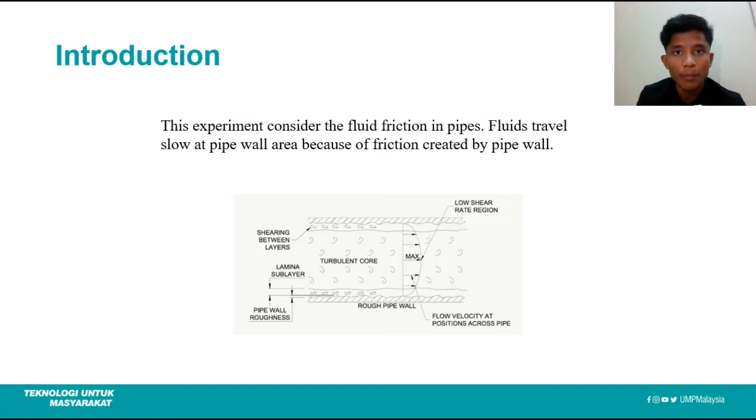I will continue from my part, which is the introduction of the experiments. Basically, in these experiments, we consider the fluid frictions in pipes. The fluid travels slowly at the pipe wall because of friction created by the pipe wall. The figures below show the mechanism of how the fluid flows across the pipes, and we can see the laminar sublayer there. The laminar sublayer is the fluid that moves slowly, and only the turbulent rapid flows allow the sublayer to form.

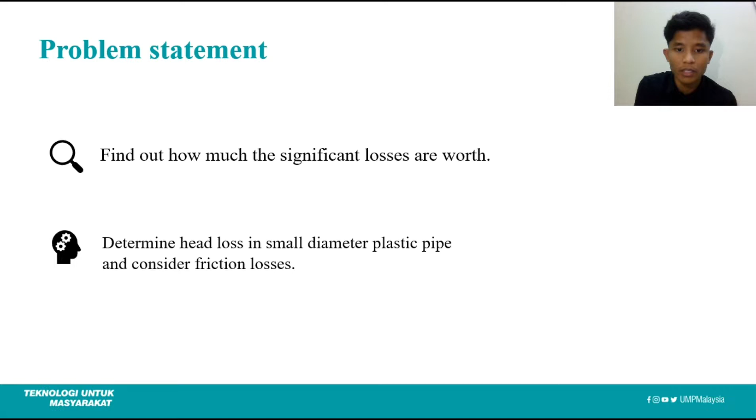Next, we continue to the problem statement of the experiments. Several challenges will occur over the course of this trial to have a good result in the experiments. The first one is we need to find out how much the significant losses are worth, because without this information we won't be able to proceed to the next level. Next, we need to determine head loss in a small diameter plastic pipe and consider friction losses.

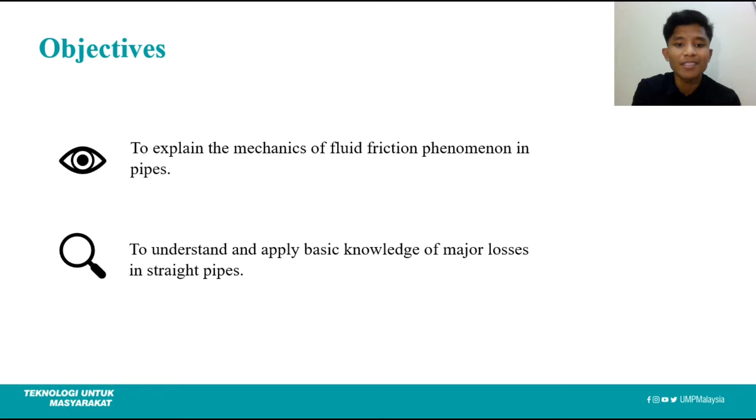The objectives of this experiment are two. The first one is to explain the mechanics of the fluid friction phenomenon in pipes. The second one is to understand and apply basic knowledge of the major losses in straight pipes.

The last part is the scopes of the experiments. First, to determine whether a laminar or turbulent flow will occur during the experiments. The last scope is to investigate the effects of different pipe diameters on velocity. The friction factor will be linked to the range of flow rates.

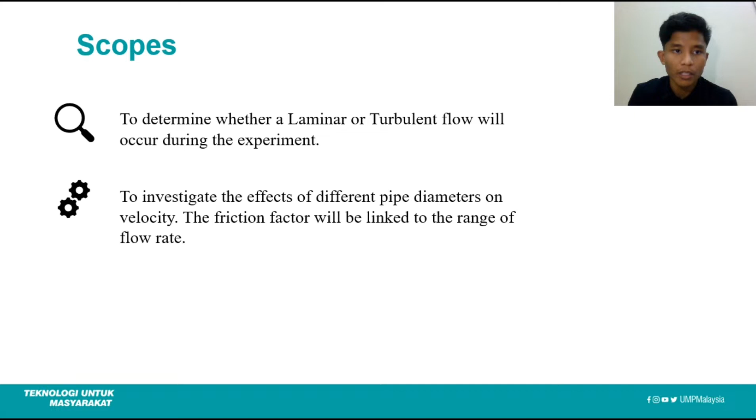For the theory, the pressure loss in pipe flows is commonly referred to as head loss. Major loss refers to frictional loss, whereas minor losses refer to loss caused by fittings. The head loss for pipe flows is the sum of these losses. In the Bernoulli equation shown above, HL represents the head loss due to friction between the fluid and the internal surface of the constant diameter pipe. As we can see here, this is the Bernoulli equation related to our experiment.

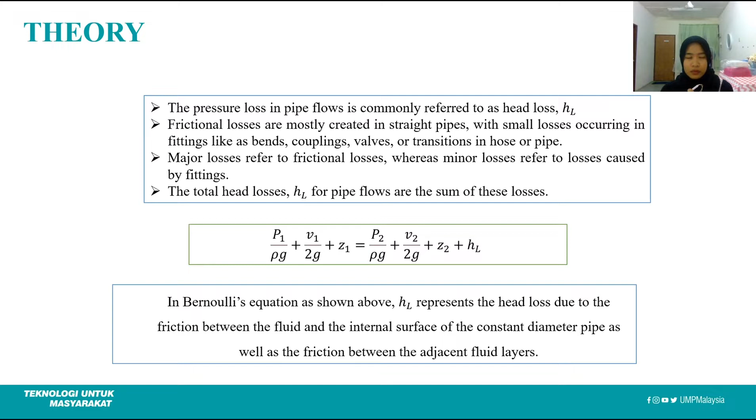Next is the Darcy equation. This is the theoretical equation that determines the loss of frictional energy in a pipe depending on the fluid velocity and friction resistance. There are different equations for turbulent flows and laminar flows. So here we can see the equation for both.

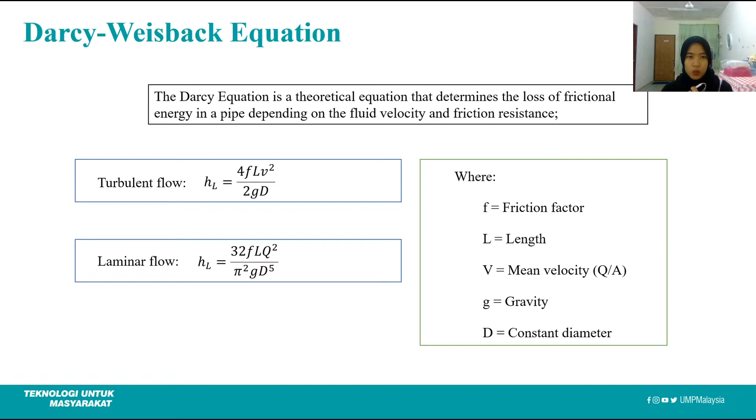Next, I will explain more about laminar flow and turbulent flow. Laminar flow is when every particle of fluid flows along one smooth path. The particles of fluid do not interfere with one another; they don't mix or shift between the layers, as we can see in the picture for laminar flow. Turbulent flow is when the flow of a fluid is irregular. Particles in turbulent flow can move back and forth between layers, as you can see in the picture below.

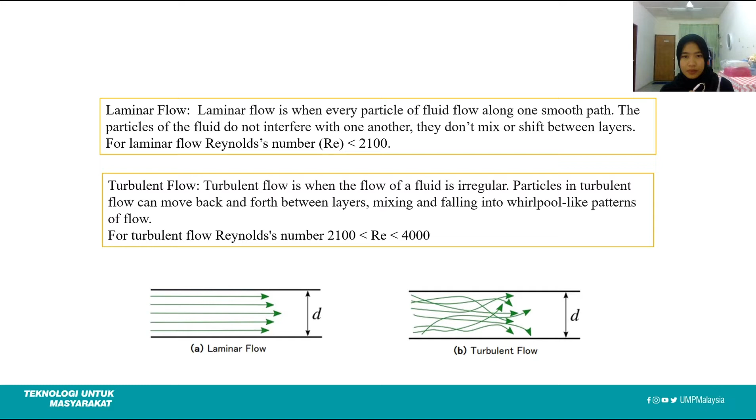The Reynolds number is the ratio of inertial force to viscous force. The Reynolds number is a dimensionless number used to categorize fluid systems. The equation for the Reynolds number here is rho VD over viscosity.

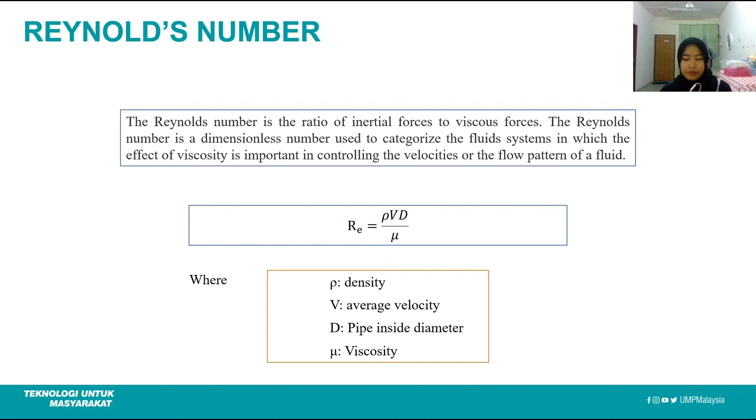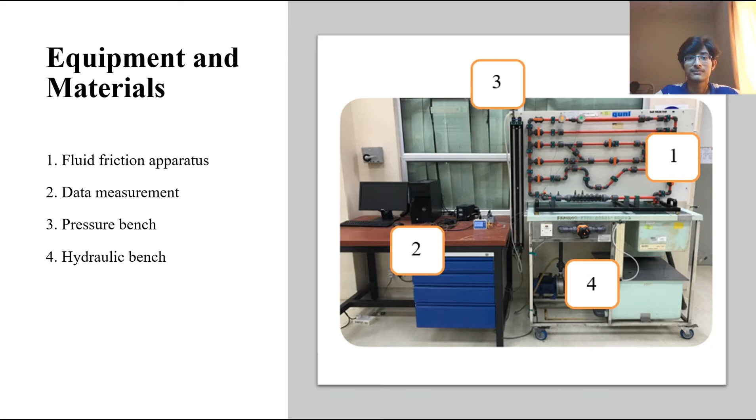Now I'm going to go through the procedures of this experiment. First, a straight pipe was fitted in the system. Then all the open valves were turned to the left.

To allow the flow of water, the pump was turned on. Then the desired volume of water was adjusted using the control valve. To run the experiment based on the data provided, the unused valve was closed.

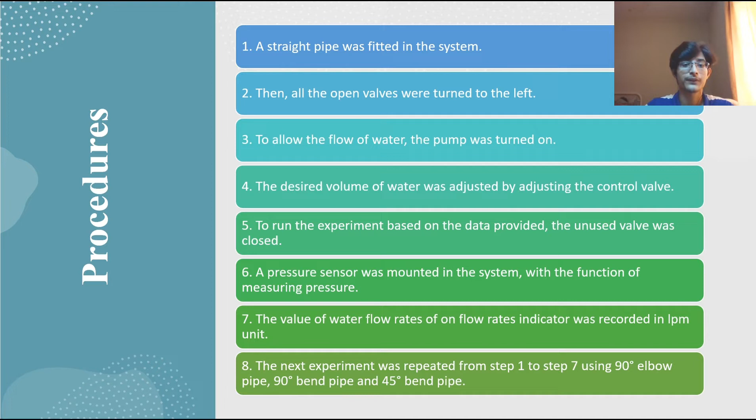Then a pressure sensor was mounted in the system with the function of measuring the pressure. Then the value of water flow rate was recorded in LPM units. The next experiment was repeated from step 1 to step 7 using a 90-degree elbow pipe, 90-degree bend pipe, and 45-degree bend pipe. That's all from me. Thank you.

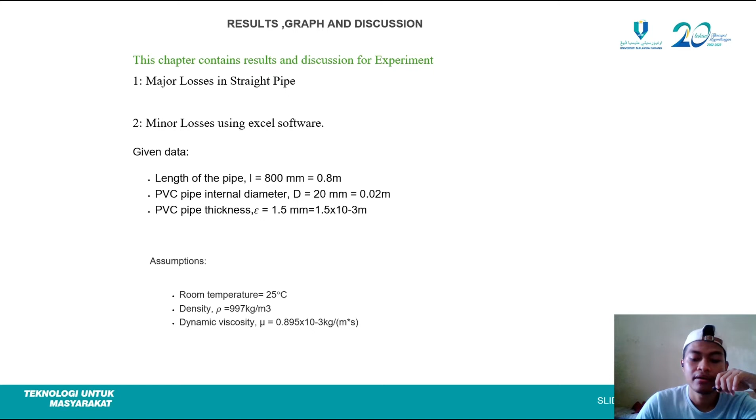Next, for major losses in straight pipe, this is the data that we obtained from Excel.

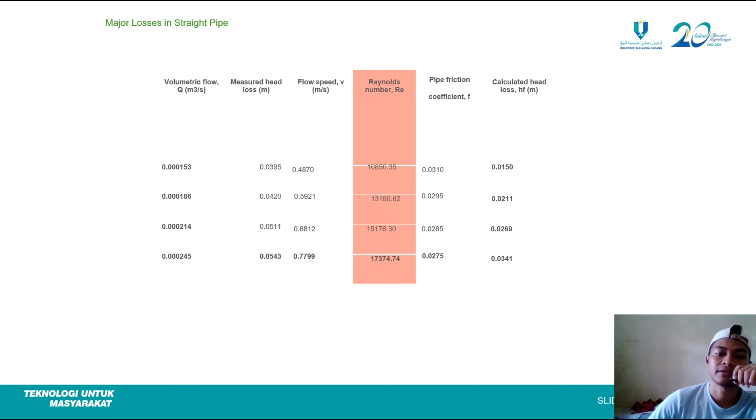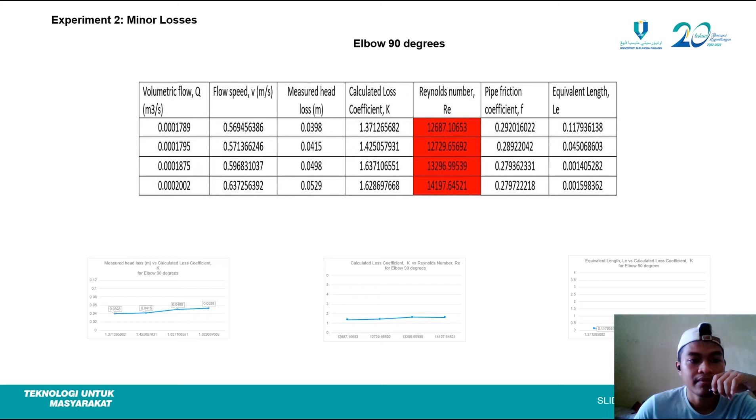Second experiment: the minor losses, elbow 90 degree. This is the graph for measured head loss versus calculated loss coefficient for the 90-degree elbow pipe. Second, calculated loss coefficient versus Reynolds number. Third, equivalent length versus calculated loss coefficient.

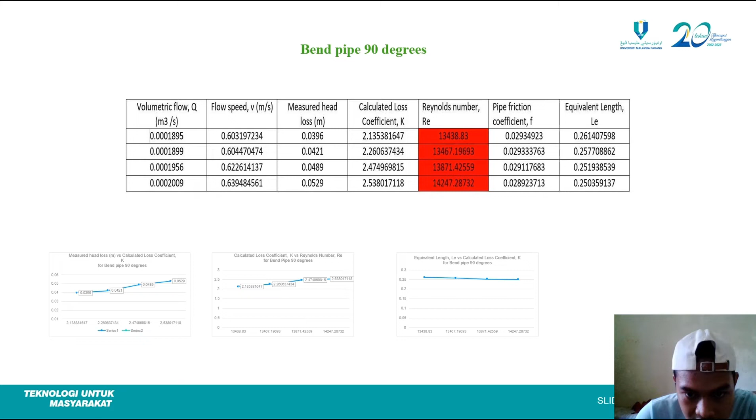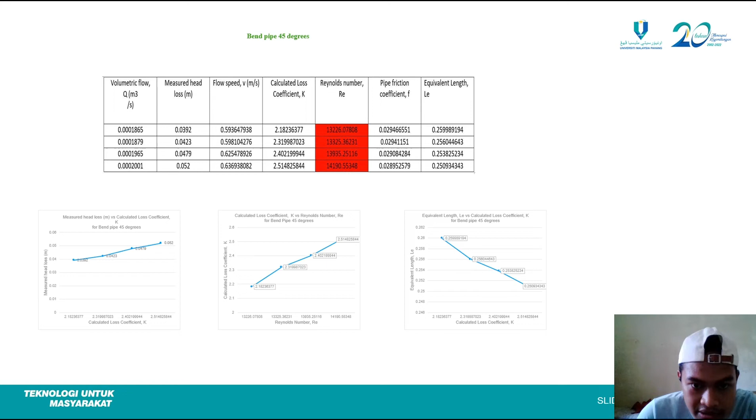Second, for the bend pipe 45 degree, here is the data. There are three graphs: first, measured head loss versus calculated loss; second, calculated loss coefficient versus Reynolds number; third, equivalent length versus calculated loss coefficient.

So the conclusion: the highest calculated loss coefficient among the three experiments under minor losses is the bend pipe 45 degrees at 2.1824, compared with 1.3712 for elbow 90 degrees and 2.1354 for bend pipe 90 degrees.

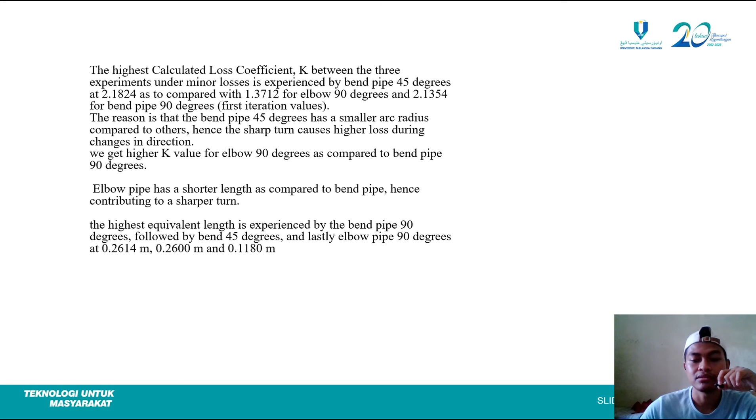The highest equivalent length is experienced by the bend pipe 90 degrees, followed by bend 45 degrees, and lastly elbow pipe 90 degrees, at 0.2614 meter, 0.2600, and 0.1180 respectively.

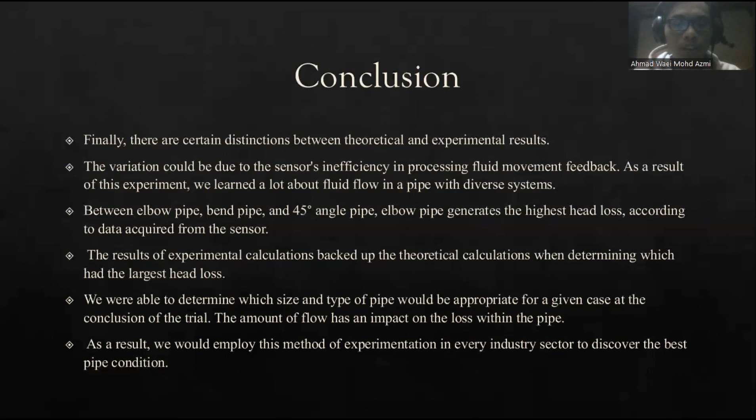Next is the second edition of Fluid Mechanics: Fundamentals and Applications, a book by Yunus A. Cengel and John M. Cimbala, published in 2008. Lastly, it's from Ahmad Zulkifli, UMP Knowledge and Learning Management System.